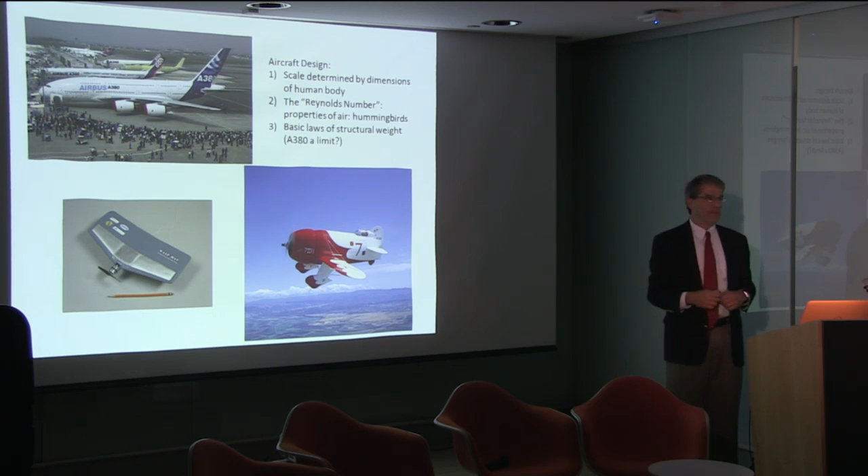But you can't really make a flying hummingbird at a human scale. I don't think we've ever made anything flapping like a bird that's gotten more than a few feet off the ground. That's about it. Practically speaking, it's just not going to happen, and it's the basic laws of structural weight you have to keep in mind.

With spacecraft, it's even more crazy in a way, because you have these enormous vehicles that burn through thousands of gallons of fuel and oxidizer just to get off the ground. It just sort of lumbers off the ground. I compare it to a Greyhound bus pulling out of Port Authority. And then what do you got at the end?

You've got this little tiny capsule that John Glenn said you didn't get in, you put it on. He was squeezed in there. We've got it on display, and boy, I'll tell you, it is small.

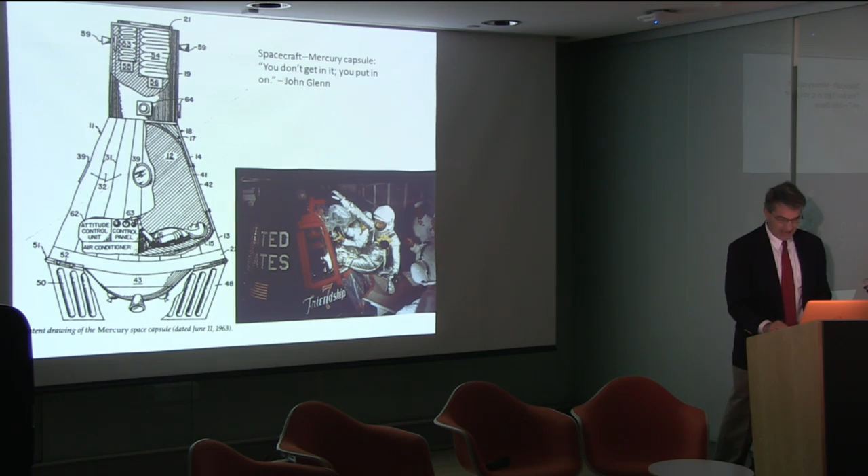We went from there to the space shuttle. This is on exhibit at the Air and Space Museum, seven passengers plus cargo, about the size of a small aircraft. The public obviously loves this thing, as you might imagine. It's incredibly impressive, but it also really pushed the state of the art for size.

And I don't think, and I'm not speaking as an engineer here, I don't think we're ever going to build anything this big again to bring human beings into space and back again. I really think that kind of pushed it a little bit farther than it probably had to go.

We are going to build shuttles again. There are plenty of them on the drawing board, but they're going to be probably smaller. There's good reasons for that from an engineering standpoint.

Another issue we deal with, as you probably know if you've been following the space program, is all the talk about going to Mars, getting beyond the moon, extending our species into the entire solar system, colonizing the planets. We may be finding life on the moons of Jupiter and things like that.

What are the practical issues? We don't have a Saturn V in our exhibit, although there are three of them in existence, in Huntsville, Alabama, Florida, and Houston. But they're 360 feet tall, 6 million pounds, and what did they do? They took two people to the moon for 21 hours, and then they came back again.

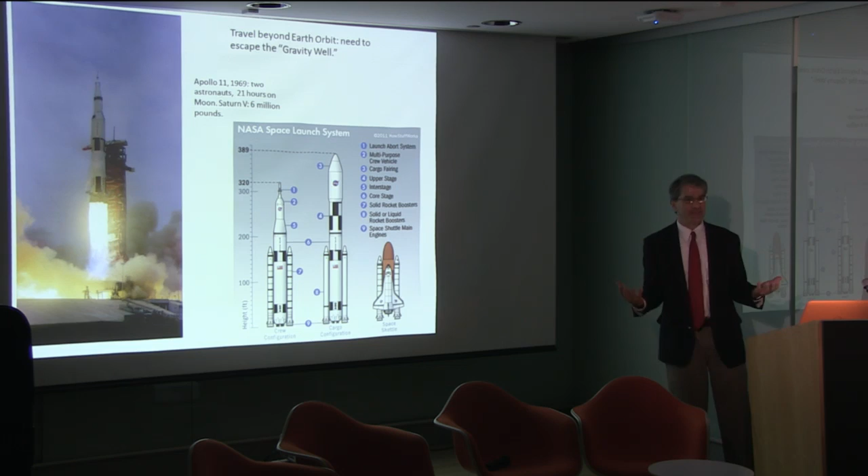So why are we doing this? Of course you have these robotic vehicles with tremendous advances in microtechnology that can do all these things. But a couple of people have pointed out to me, you all know about the Curiosity rover on Mars doing all kinds of wonderful things. If you could have gotten a human being onto Mars, he or she could have done the same kind of science in about a week of walking around that Curiosity has taken a year to do. So you want the human being. Now you've got to solve all these technical problems to get a human there, but that's what you have to do, because human beings want to explore. It's in our nature, and we're going to explore one way or another. We're going to find out a way to do it.

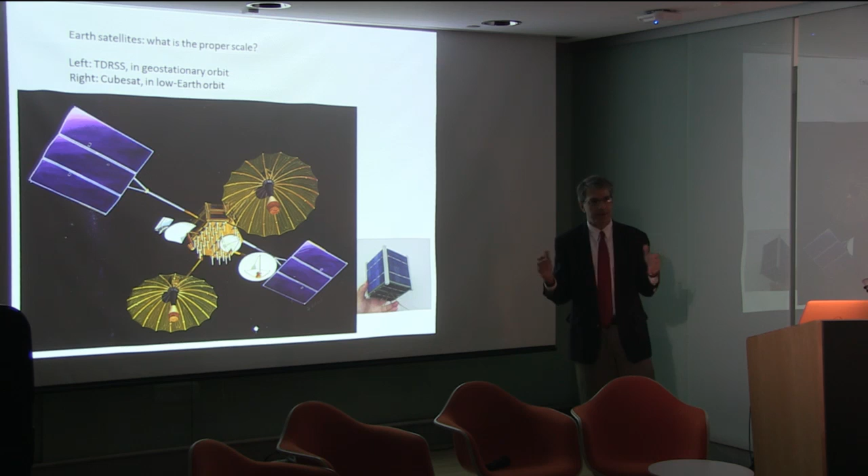So again, this is the scale that we have. These are the very popular CubeSats, about this big, built on college campuses, that can do all kinds of wonderful things using recycled iPhone parts and things like that. This is sort of the upper limit, called the Tracking and Data Relay Satellite System, which is up in geostationary orbit. Interesting story there: in the early days of the space program you had tracking stations all around the world, some in politically very sensitive places where people were a little nervous about Americans coming in with sophisticated electronic equipment. All of that has now been replaced by a series of satellites way up in space, where you send the data up there and then down to the ground in the United States, and you don't have to worry about that. So that's a big thing.

This is a little thing, but do we really want to have a whole bunch of these swarming around in low Earth orbit? I'm not so sure about that. It could get a little bit polluted up there.

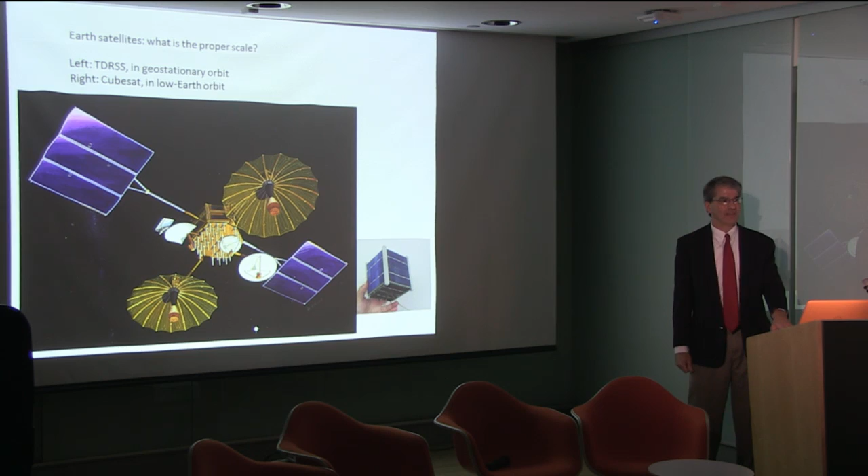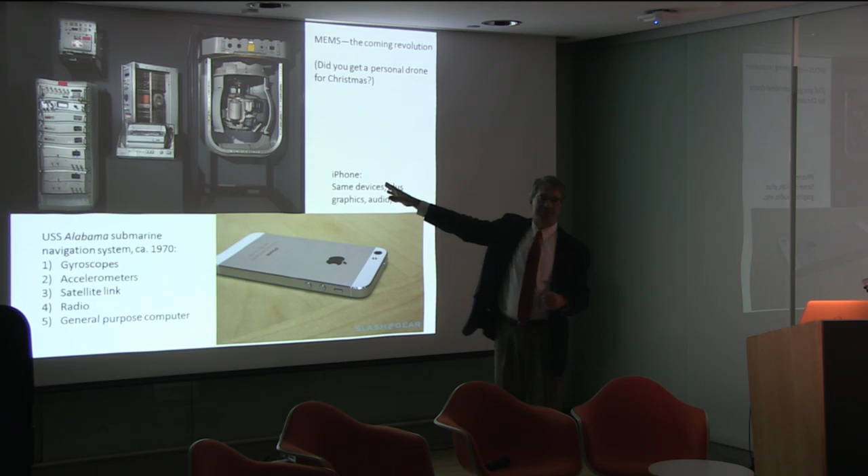So I'm going to conclude really quick. You've got an iPhone upstairs, and you know all about all the things it does. Our exhibit opened at the Air and Space Museum last year that shows an inertial navigation system from a submarine. There's the gyroscopes, the accelerometers, there's the computer, there's an IBM typewriter which is a keyboard, and those are the radios. Here it is, all in the iPhone. You've got all of that.

The irony of it is really weird, because this device was used to navigate the submarine so that it could stay secret—that's what a submarine is for. It had to poke a little antenna up every once in a while to take a fix from a satellite to fix its position. Most of the time it was completely secret; they didn't want to tell you anything about them. In fact, submarine people are the quietest people on Earth, they really just don't talk. The iPhone tells the whole world where you are all the time, whether you want to or not. They know where you are. Somebody knows where you are, and it's usually a department store or Google or somebody else. I don't even want to go there.

But anyway, it's the same technology, it's just shrunk a lot. So with that, I guess when you change scale, all kinds of interesting things happen. And I think I'll just leave it at that. Okay? Thank you.

I'm excited about the museum reopening and having this exhibit and display as one of its first.

I'm going to talk a little bit tonight about East Side Access, the current project I'm working on. Some of you may be familiar and several may not be familiar with what East Side Access is. I'm also going to talk in terms of scale, as Paul started us off on. We're going to talk about tunnel boring machines and some very large construction equipment and construction tools.

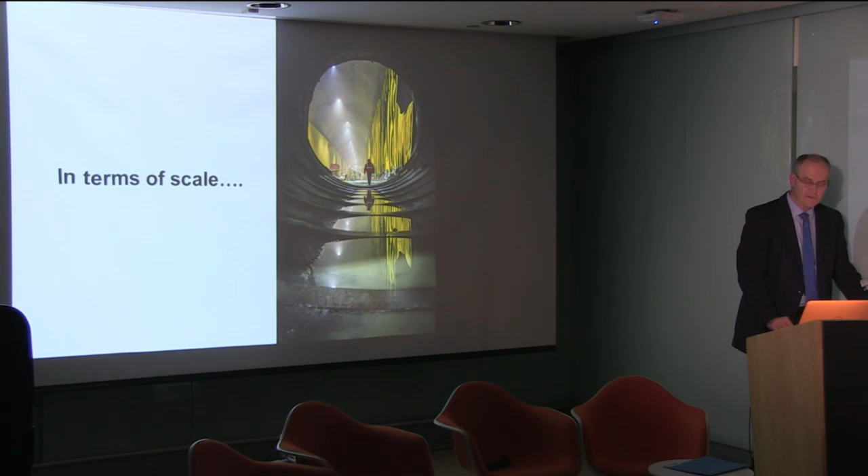But what I find fascinating about the construction industry is there's an awful lot of hand tools and an awful lot of innovation that has to go into how you use a whole variety of scale of tools to do different things as far as trying to construct what the designer has provided to the contractor.

East Side Access is one of the three mega projects under construction by the MTA right now. Second Avenue Subway is about $4.5 billion for phase 1, scheduled to be completed in December of 2016. The other one, a little more near term, is the 7-line extension to the west side. That's about $2.4 billion, and that's actually going to go into revenue service the 2nd quarter of this year. So they're getting pretty close on that one.

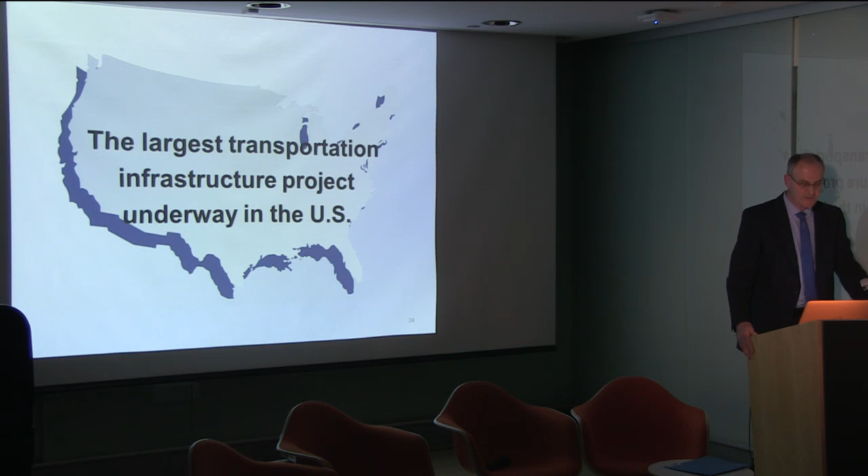East Side Access is our largest infrastructure project. It happens to be the largest transportation infrastructure project underway today in the United States. It's the first expansion of the Long Island Railroad in over 100 years.

This is a good diagram, it really shows what we're doing. Right now, as most of you know, the Long Island Railroad comes into Penn Station, and Metro North comes into Grand Central. The primary purpose of the project is to bring Long Island Railroad into Grand Central Terminal. So we've done tunneling in Sunnyside Yard in Queens, on the right side of the screen. We've made a connection to the 63rd Street Tunnel, which was built back in the 80s for New York City Transit, but it was also built with a tunnel for Long Island Railroad with East Side Access in mind.

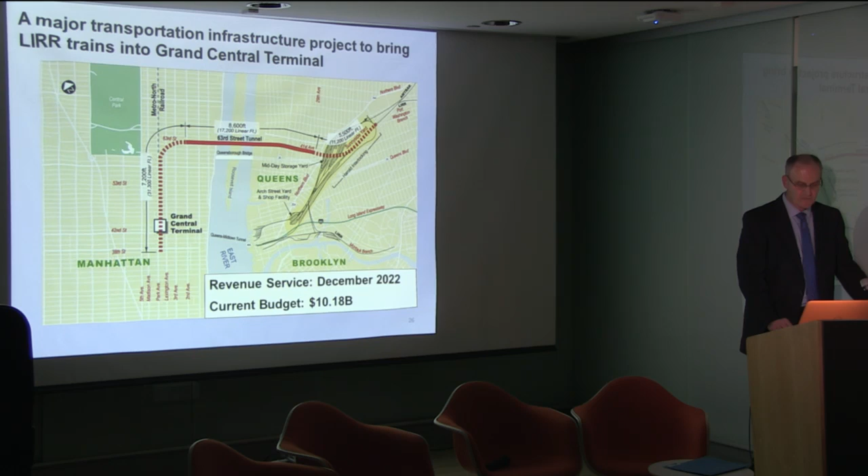This is a project that's been in planning for decades, and incrementally we've been putting infrastructure in place for it. The tunneling comes down through Manhattan from 63rd Street, underneath Grand Central, down to 37th Street. As you can see there, it's about $10.18 billion, our current budget, with a revenue service date of December 2022.

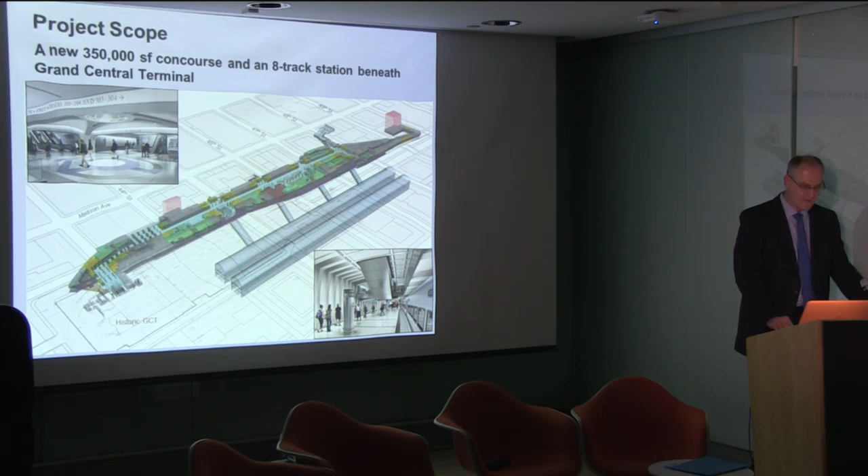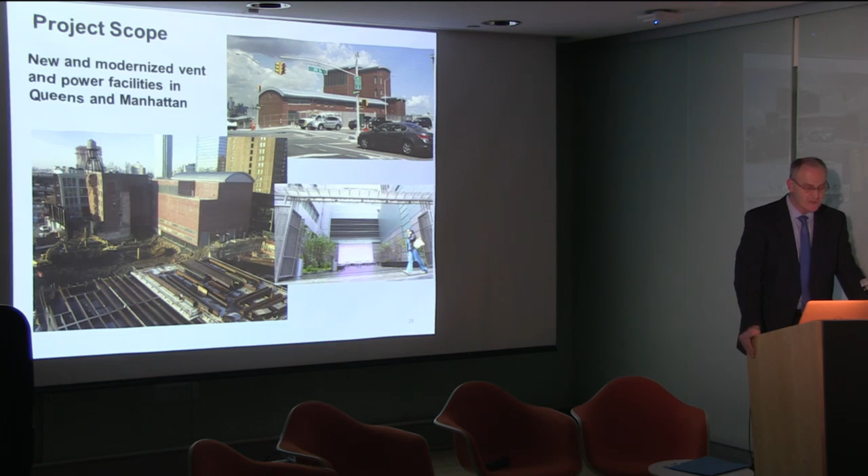This is a rendering of what's being constructed. It's about a 350,000 square foot concourse below Grand Central, with a new 8-track station beneath Grand Central, connected by high-speed escalators from the train platforms up to the concourse. We're also building new train yards and maintenance facilities in the Bronx and Queens, and new modernized ventilation and power facilities both in Queens and Manhattan.

It's also going to support job growth in the area around Grand Central Terminal, where there's a lot of development planned. And it's going to improve our East River Tunnel capacity by over 50%, because we'll be diverting traffic from Penn Station through the 63rd Street Tunnel below Grand Central.

So some of the tools and equipment we used on East Side Access: tunnel boring machines. We've used four tunnel boring machines that I'll talk about. This is a SELI TBM — SELI is the manufacturer. We also had a Robbins machine, a Hard Rock TBM. Both of these are Hard Rock tunnel boring machines. This is a pretty good picture — they're all pretty similar, using what we call cutter disc technology.

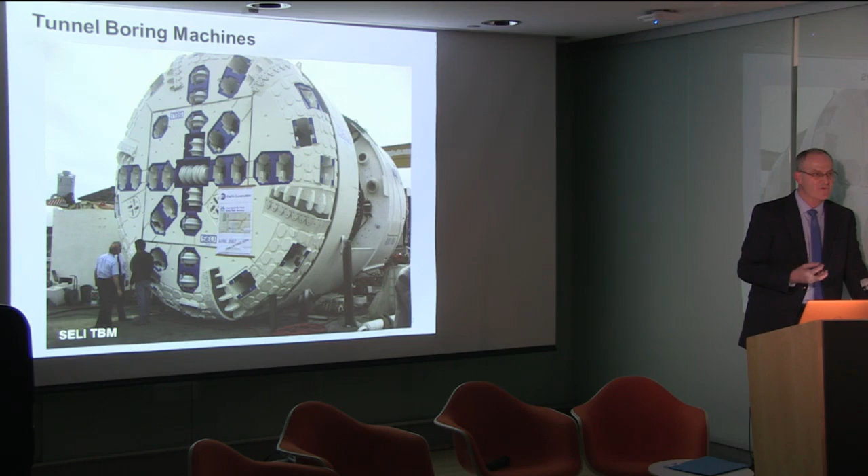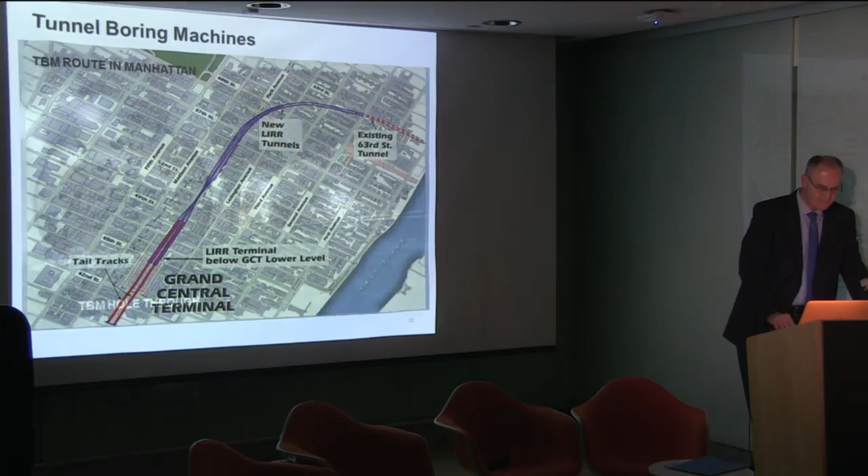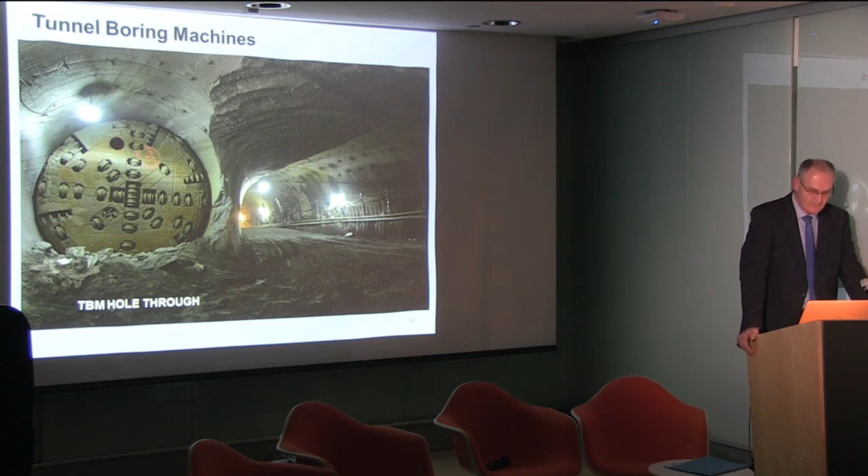This is a picture of one of the tunnel boring machines holing through, which is an exciting part because you're at the end of a drive. There's an awful lot of work that's gone into getting to that point.

This is a picture of the very south end of where we were tunneling, down to 37th Street and Park Avenue—this is the end of the TBM drive. We had two Hard Rock TBM machines. The Robbins machine was removed by the contractor and dismantled.

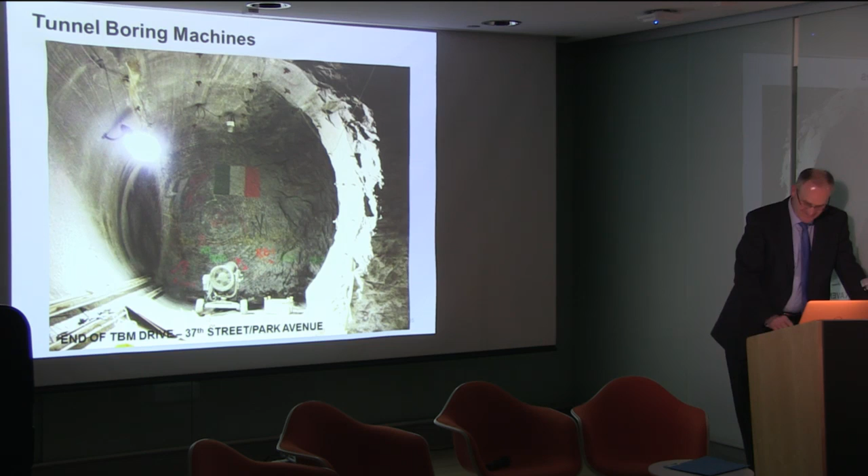The Seli machine was backed up from this point, and the crew took a hard right turn and buried the machine in the bedrock. So we've created a time capsule down around 36th Street and Park Avenue for someone in the future to uncover quite a surprise when they excavate or drill in that area.

These are the soft ground tunnel boring machines that were used over in Queens, underneath the rail yard. They're designed differently—they have the ability to go through soft ground, and they do it under what we call a slurry mix to maintain stability.

There were 2 machines, 4 tunnels, and 4 drives done over about a 2-year period. Herrenknecht was the designer and manufacturer, a German company, for these machines. All of our tunnels are 22-foot diameter tunnels—that's the tunnel size for both the subway and the railroad.

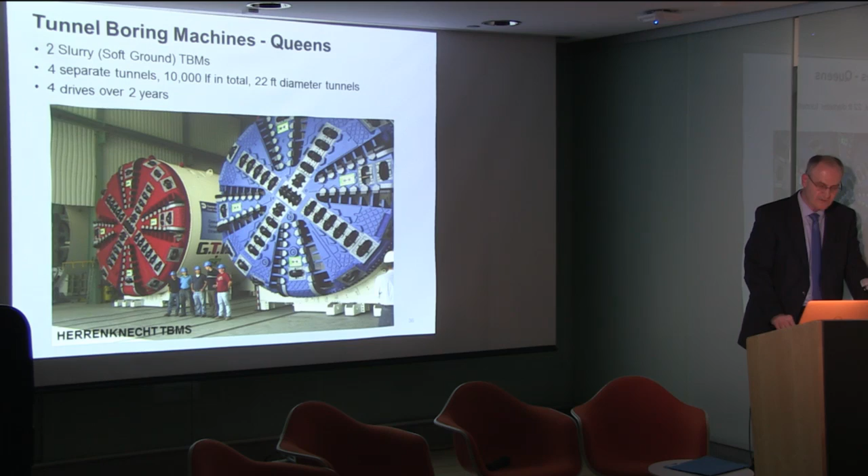This is a diagram of Queens Boulevard at the bottom of the slide, with Northern Boulevard just to the left to get you oriented, and this is the Sunnyside Yard area in Queens. We had to build a box first to assemble the TBMs and launch them, shown in the lower left, and then you can see the 4 tunnel drives that went out underneath the Sunnyside Yard, under the active rail lines.

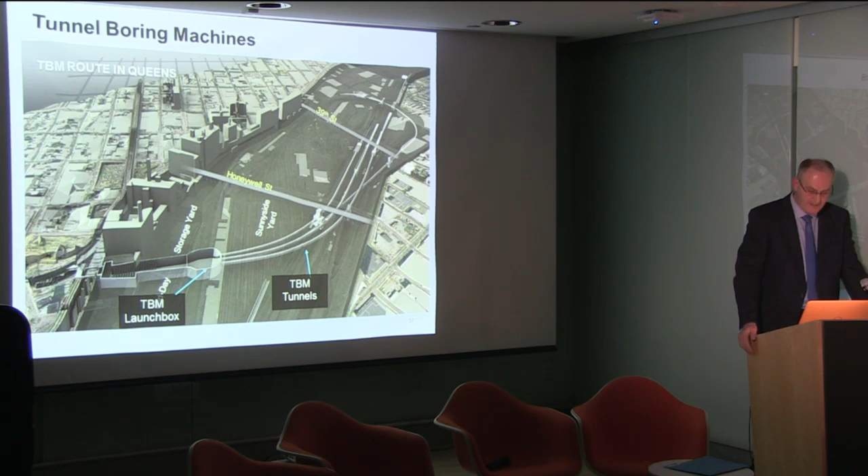This is just a shot of the launch tunnels. You actually have to cast these in concrete to build a place to start—like a pilot hole if you're trying to drill. You have to start with just the launch area.

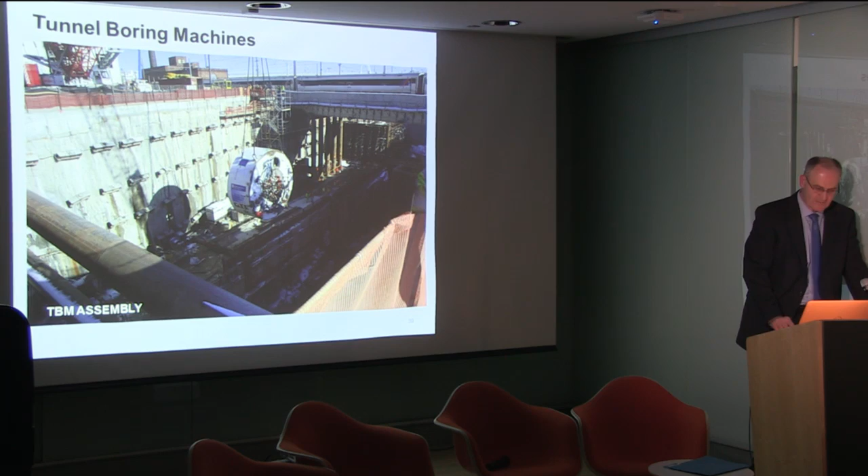This is the part of the machine coming in. As an example, on 2nd Avenue Subway when we built the launch box at 96th Street, the contractor had 35 trailer loads of equipment that came in to assemble 1 TBM machine to operate on 2nd Avenue—so you can imagine the amount of time and effort by the contractor and crew to assemble the machine.

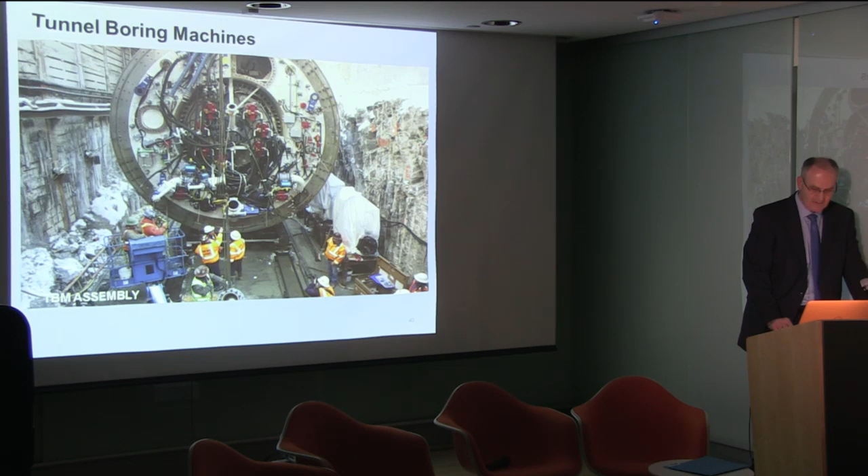This gives you a sense of the scale of the machine and the hydraulics and electric as it's going together—you can see the men standing at the bottom here. And when it's all assembled, it's ready to go into the launch box.

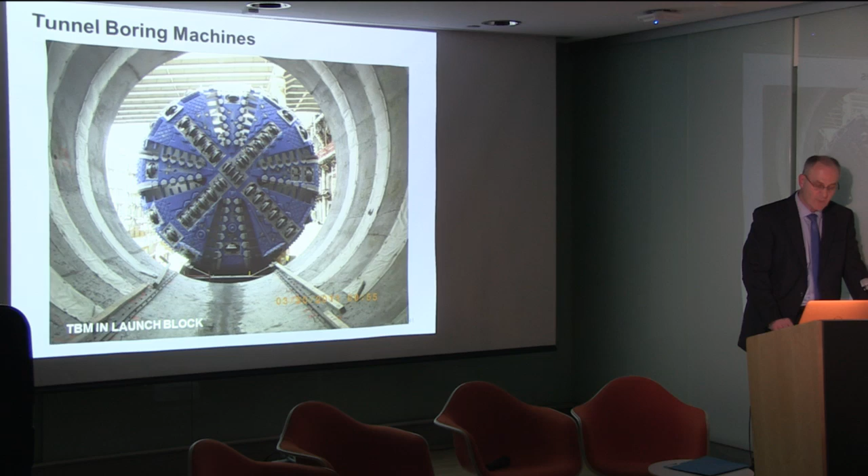We did not have the luxury of shutting down Amtrak or Long Island Railroad for this project—we had to maintain an operating rail yard. So micro tunneling with small boring machines was utilized to cross the rail yard.

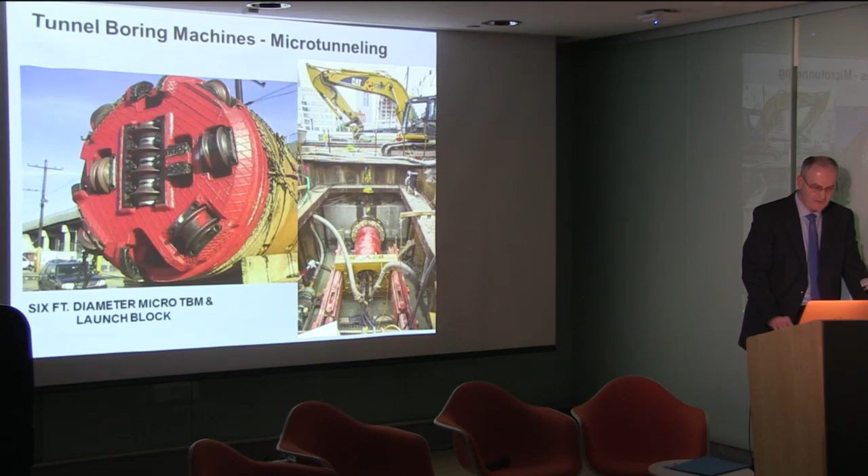This is the other end, and there's a lot of work to get these machines in and out.

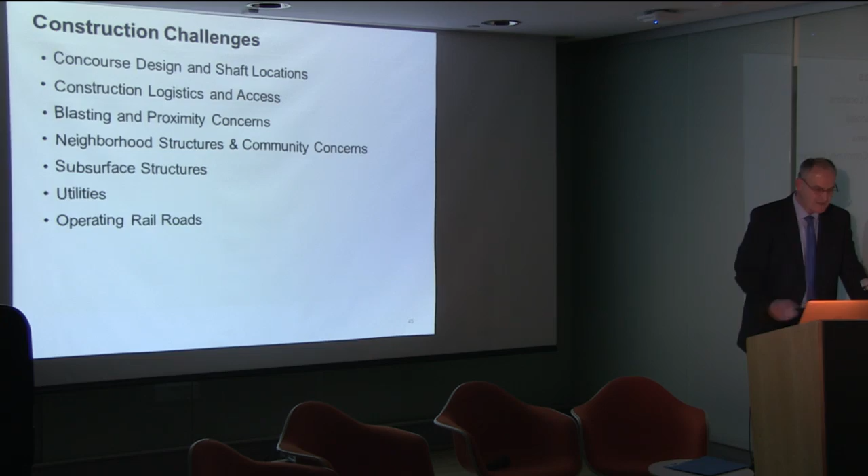So this is the demobilization of the machine. A lot of construction challenges in projects such as this. I'm going to touch on some of these as I go through some of the other tools.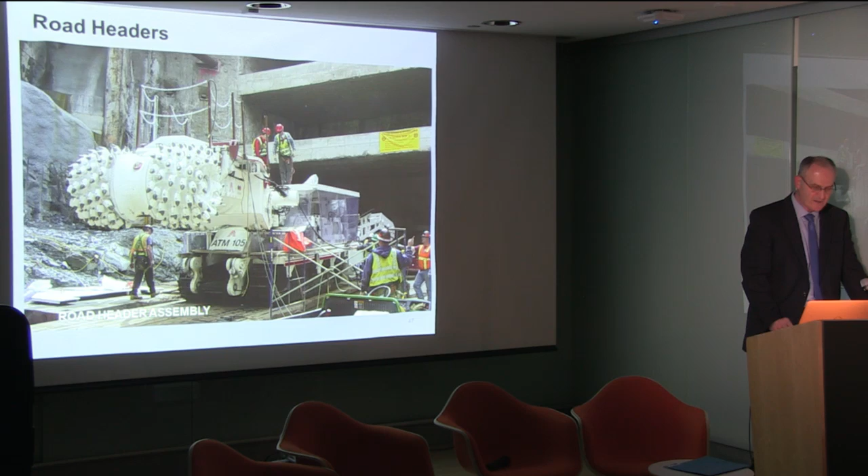So obviously we need to modify tools and use specialized tools for different challenges. In areas where we really can't use blasting or a tunnel boring machine, we'll use what's called a road header. It's kind of a gnarly looking machine, but these rotate and we put them inside the cavern, and if you look closely, you can see the grinding on the walls. So we'll trim the walls back to finer work than the tunnel boring.

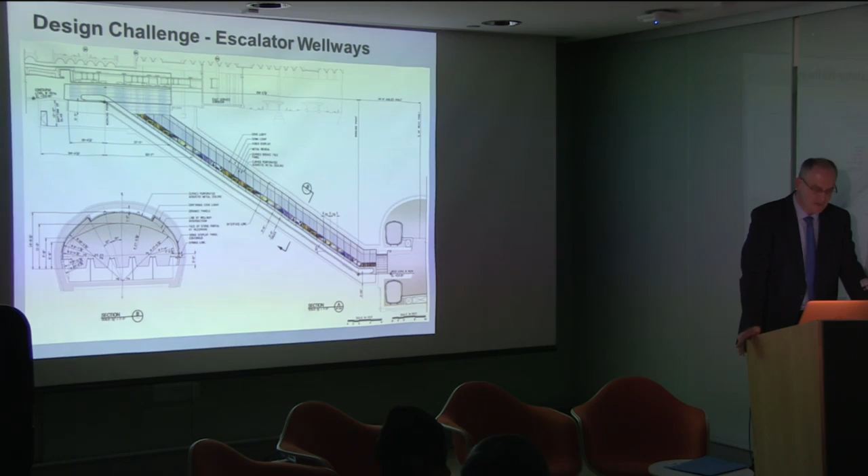I mentioned before we had escalator wellways, which we have a total of 17 escalators that are going to service the new train station up to the concourse. So one of the challenges was, how do we excavate these wellways? This is what the escalator is going to look like in the future as you come up.

But inside of the terminal, below the terminal, this is what it looked like when we started. We first had to remove columns and do underpinning and put in these large beams all the way across to create an opening where these wellways were going to go. And then you can see that we've started doing some rock removal here to start the wellway.

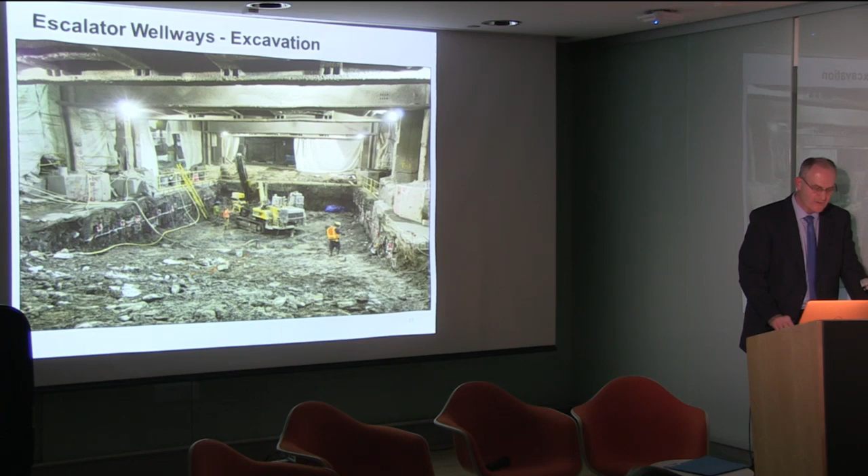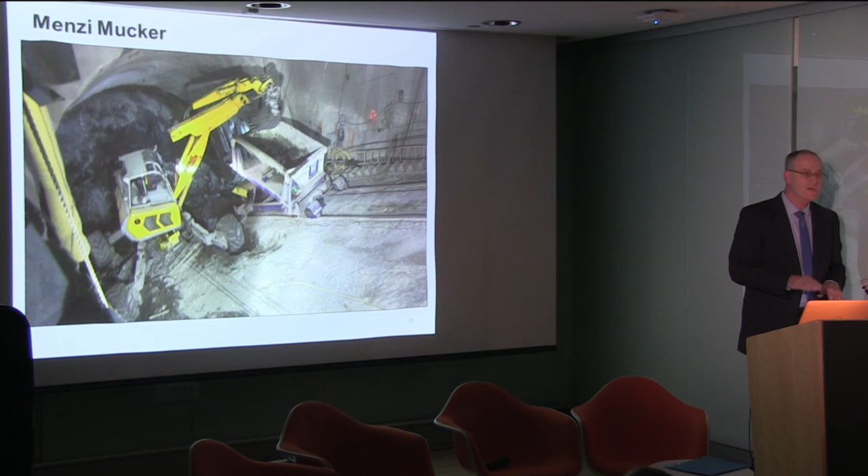Then you get into, of course, the wellway is a steep incline for the escalator. And you've got specialized equipment like the Menzi mucker, which is quite a piece of equipment. It has articulating not only the boom with the excavating bucket, but each of the tires and legs of the machine can be independently operated and adjusted. So this can move up and down over rough ground, as well as up and down an inclined slope.

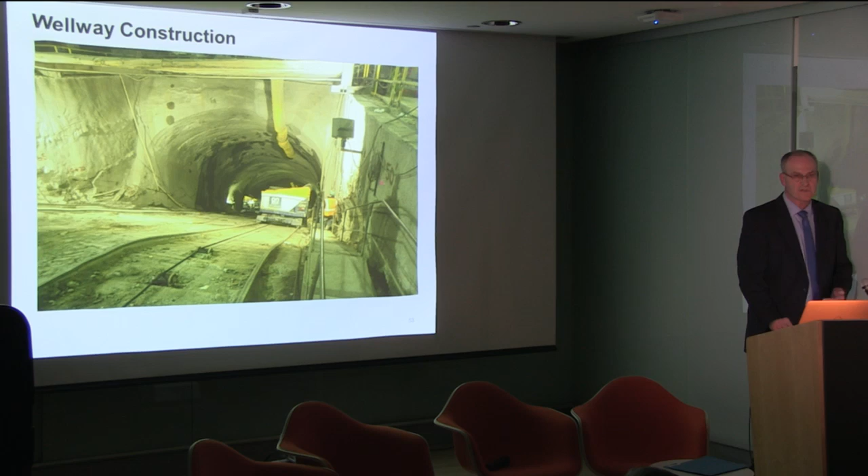And you can see we used a muck car here on the side on a rail, and it comes up and down on a winch system. These are some of the tools that are used in this type of construction to excavate rock.

This one is kind of interesting. This is called a raise bore machine. This was down at 37th Street. We had a need to put in 3 vertical vent shafts very close together, and you can see we're near the existing Park Avenue tunnel, the Lexington Avenue subway line, and we're in close proximity to the Union League Club. So blasting was not an option for these.

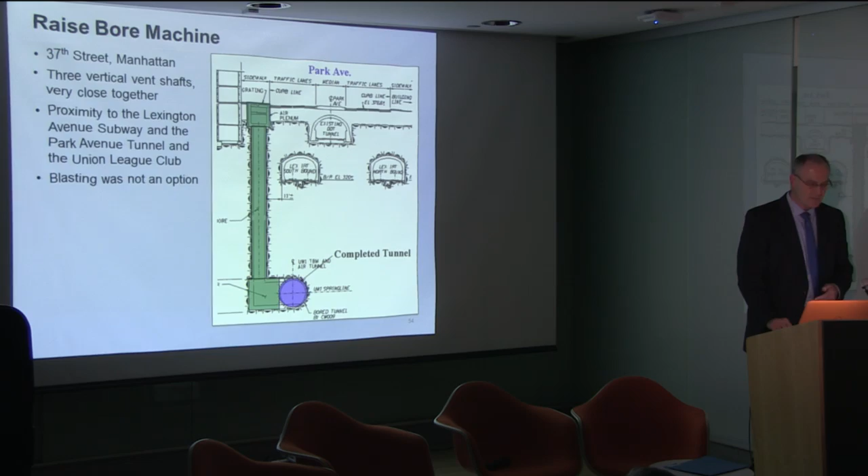This is a picture of the Union League Club and our work zone out here, and you can see the drill shaft, which I'm going to explain in a minute.

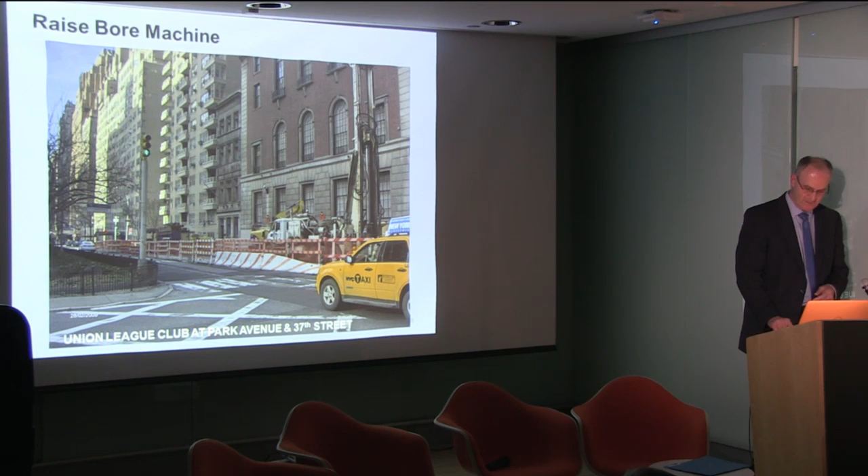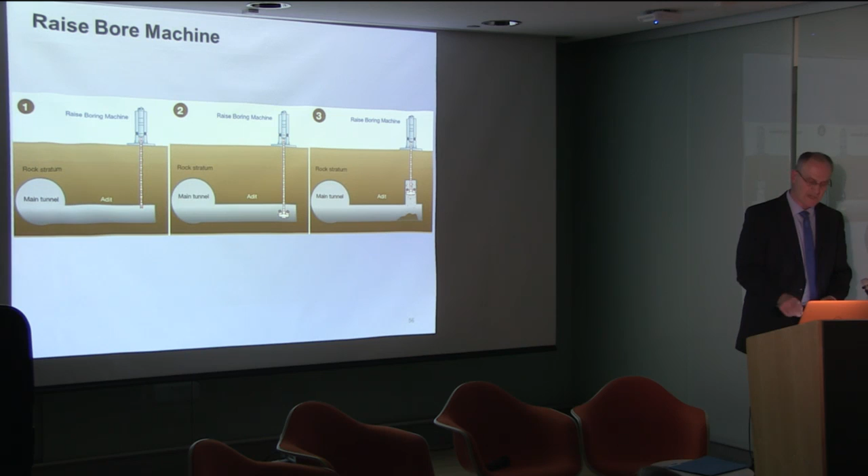This diagram here shows a raise bore machine. If you look over on the left, basically you start with a pilot hole and you drill down to your tunnel area that you're trying to sink your shaft to. And inside there, you then can build and assemble the raise bore portion of the machine, and then you actually excavate it from the bottom up. And gravity, of course, you drop the rock into the bottom of the tunnel to remove it.

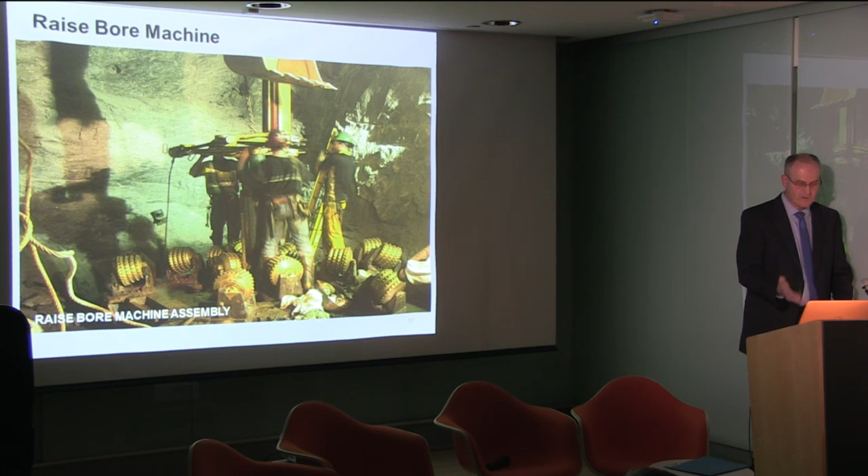So this is what it looks like in the field. You have to assemble this in the bottom of the tunnel, which is eventually the bottom of the shaft. So you can see the crew here, a lot of handwork, a lot of chain falls and stuff to move these heavy heads around to get them all aligned.

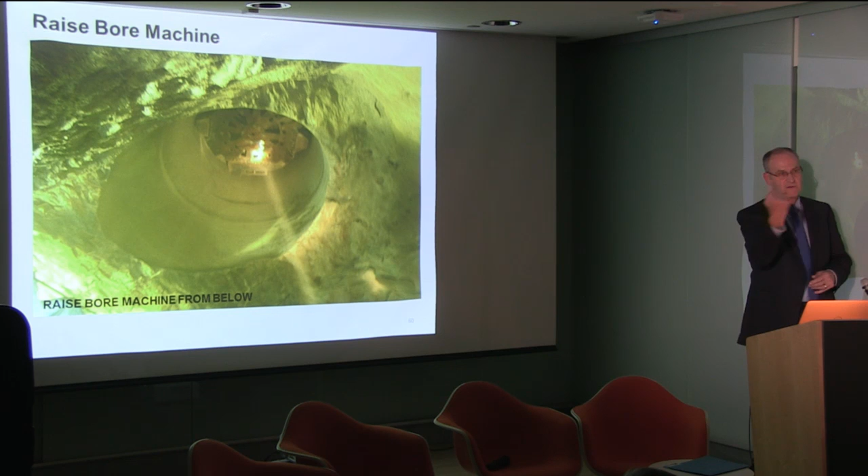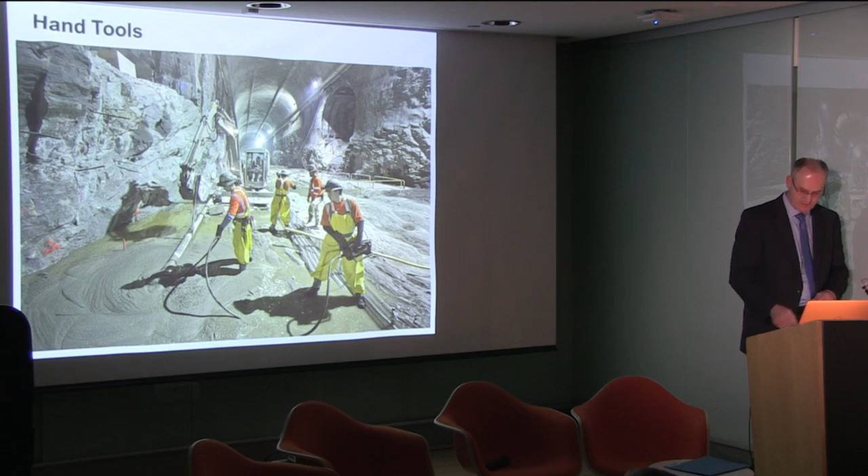Some of the hand tools that I referred to, this is probably a good example here. We place an awful lot of concrete in the caverns and tunnels. You got a crew here using a vibrator. The man on the left's got a vibrator where we consolidate and move the concrete. And of course that has to have its own motor and power, and that's what the guy on the right is holding, the motor that operates that.

And then you get into these very large caverns, and you have the need to do shotcrete work, which is another concrete technique, and you got to have articulating hand booms, or man lifts rather, that get the people up high on the wall where they need to be so they can do that.

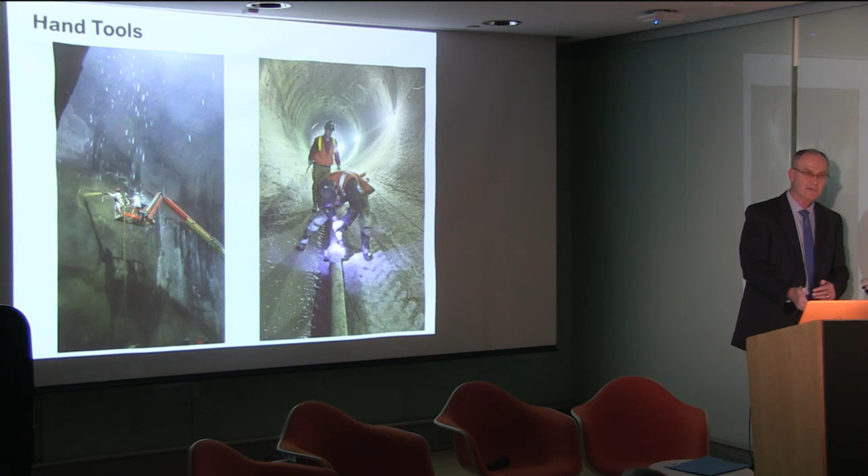The shot on the right shows we move an awful lot of material, whether it be concrete, water, or air, by pipe in the tunnels. This crew is using a drill to tighten a coupling. It's all mechanical coupling for these pipe connections.

A lot of work goes into placing concrete. On the left you can see all of the through bolts and braces and stuff that go into formwork, which you need to put in place in order to place and build reinforced concrete walls.

The worker on the right has got a hand drill that he's using to chip and remove concrete. The yellow material in the background is the waterproofing. All of the tunnels are waterproofed, as well as the cavern. And there's always a lot of drilling of temporary attachments that need to be made.

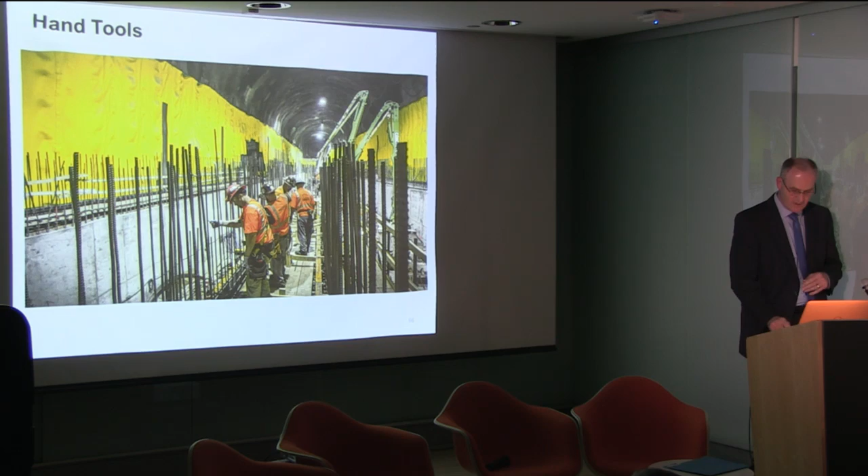This crew here is what we call lathers. It's a little hard to see, but basically in their tool belt they have a spool of simple steel wire and cutters. You want the wire to be able to bend but not break—strong enough that they can tie and make mechanical connections from one piece of reinforcing steel to another, to hold the reinforcing steel in place until the concrete can be placed around it. That's all handwork with wire and ingenuity.

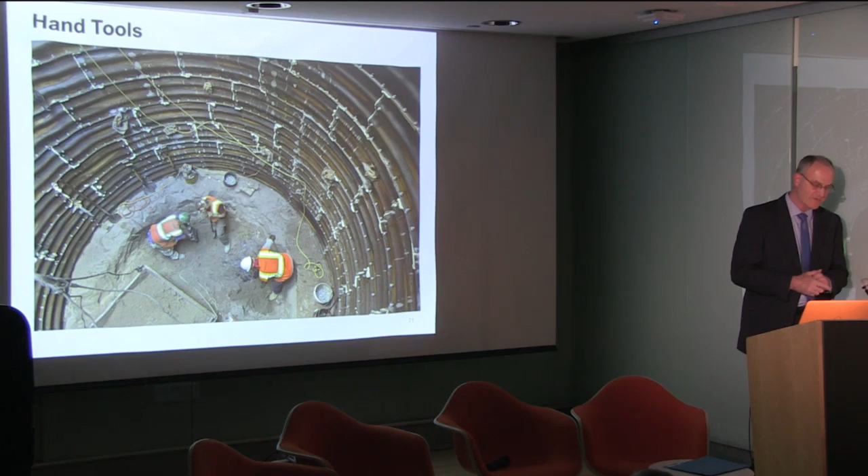In the rail yard, we've got challenges because of operating trains. We don't have a lot of room between rail lines, and oftentimes you've got to do an awful lot of handwork, especially when excavating at the surface. Even some of the larger excavations, trying to uncover a large utility pipe at the bottom, end up being handwork.

There's a lot of hand shoveling—they're shoveling into a skip pan, which then comes to the surface to get loaded out. So this is just a simple picture: as advanced as the technology is for TBM machines and that sort of thing I've shown, there's also an awful lot of hand digging with various types of shovels and pinch bars for various equipment in heavy construction. So, thank you.

Our last speaker is Chuck Hoberman. He's an inventor who seamlessly fuses the disciplines of art, architecture, and engineering in his work on transformable structures. Through his products, patents, and structures, Hoberman demonstrates how objects can be foldable, retractable, or shape-shifting. He is the founder of Hoberman Associates, a multidisciplinary practice that utilizes transformable principles for a wide range of applications, including dynamic architecture, transformable stage sets, consumer products, deployable shelters, and structures for aerospace. Examples of his commission work include the transforming video screen that served as the primary stage element for the U2 360-degree World Tour from 2009 through 2011, the Hoberman Arch in Salt Lake City, installed as the centerpiece for the 2002 Winter Olympics Games, a retractable dome for the 2000 World's Fair in Hanover, Germany, and the expanding geodesic dome at the Pompidou Center in 1997. He's also been included in some of our exhibitions here at the Cooper Hewitt, the triennial being one. So Chuck?

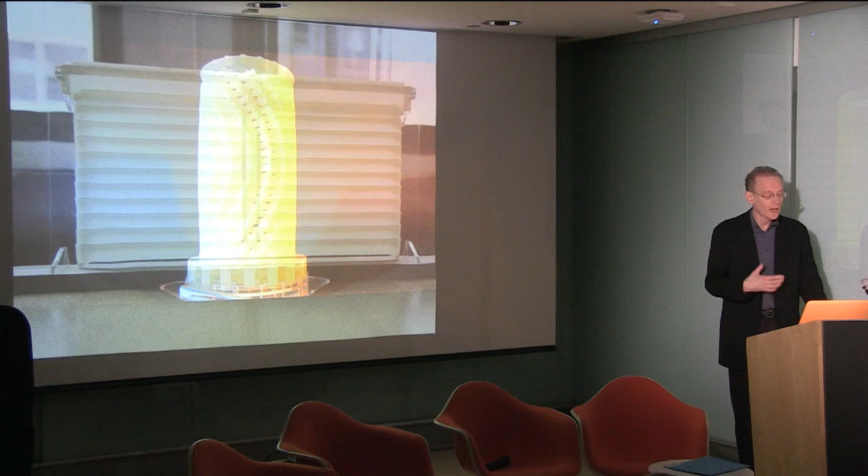These are just laser-cut plastic linkages. Nowadays we can also make these types of structures using 3D printing. This, in fact, is a mechanism comprised of hundreds and hundreds of joints that transforms, but it's all done from a single 3D print.

This is a prototype for a kind of curtain, and you'll see that a prototype like this shows the actual physical scale mock-up. It's for a curtain for a residence in Japan, about 30 feet across, being raised up. So does building at scale tell you that something is going to work? No, but it can tell you that something may not work. It's a precursor to doing the kind of testing that a mock-up like this allows.

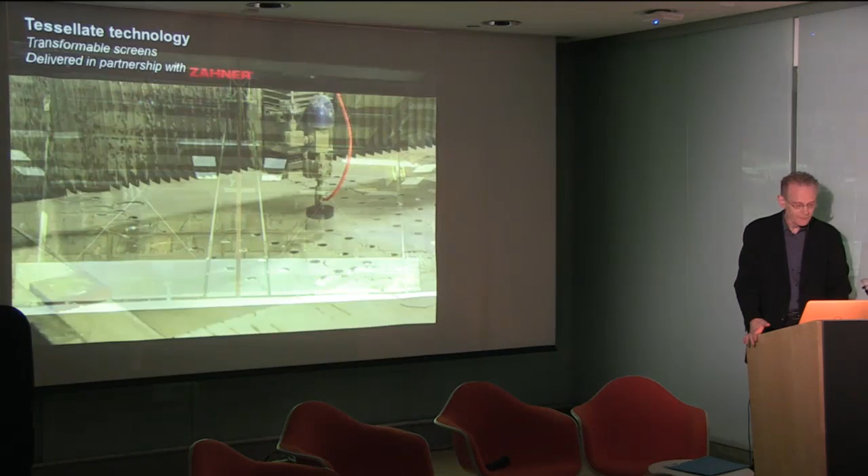We do a fair amount of architectural work for facades. This shows some manufacturing processes for a technology we call Tessellate, which are transformable screens. This is done at the Zahner Company in Kansas City, and I'll show a brief video of this particular project.

It's a kind of mid-scale project for us, somewhere between architecture and art. It's 8 screens, each one about 5 feet wide by 12 feet high, of shifting layers of stainless steel that control the light coming into the space. It's at a building called the Simons Center for Geometry and Physics.

I've had this concept for transformable design for a few decades now, and it's been a company that's a little unusual in that it's based more on a design concept and not on any particular sector. We've applied it in a number of different sectors at different scales, running the gamut from miniature medical instruments all the way up to architectural scales.

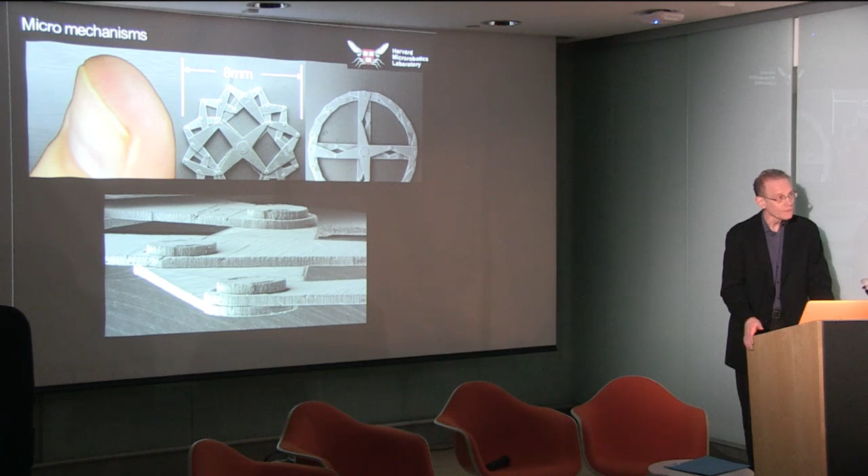This is more on the research side - some work I'm doing with the robotics lab up at Harvard, the same lab that did the RoboBee that Matilda referred to in the exhibit, showing a Hoberman linkage built out of a carbon laminate using micro-machining techniques. You can get a sense of how tiny these little articulated links are.

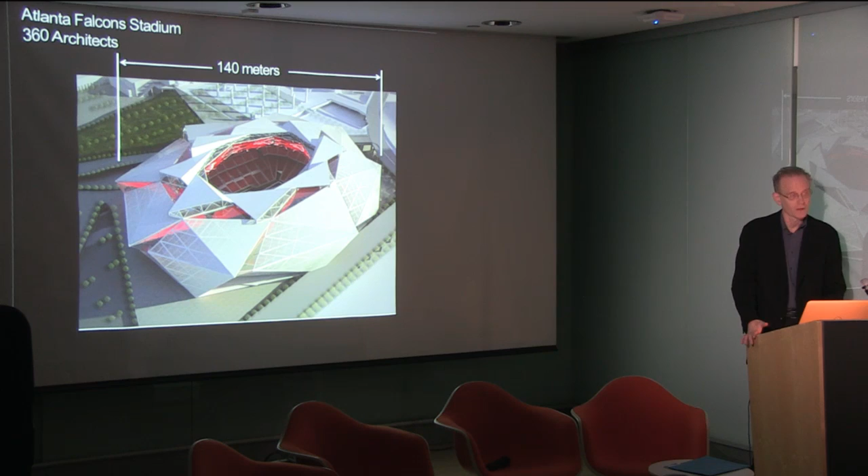At the other end of the spectrum, we're part of the team designing the retractable roof for the new Atlanta Falcons Stadium, which should be finished around 2017. From a design standpoint, in each case, from something the size of your thumb to something the size of a football field, you're using the same basic mechanical principles - there's something common in terms of the system.

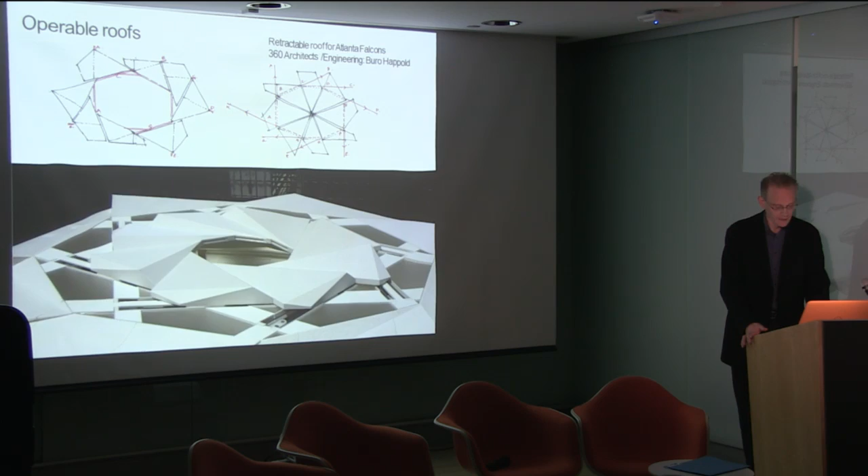For this particular project for the Atlanta Falcons Stadium, we were more involved in the creative concept stage, and this is a scale model that my group constructed - 3D printed panels sliding in a linear fashion to create this oculus. You can see at scale what it will look like, and 360 Architects created this. It's a very unique design in that it's an aperture that relies on linear motion instead of rotary motion, and will be quite an unprecedented configuration for a retractable roof at this scale.

For a project like Atlanta Falcons, we're just a small consultant as mechanization specialists on a very large project. But for more typical projects for Hoberman, we do everything from design all the way through the construction process. This is a project which was, at the time, the largest we had done to date - a curtain for the Winter Olympics in Salt Lake City in 2002.

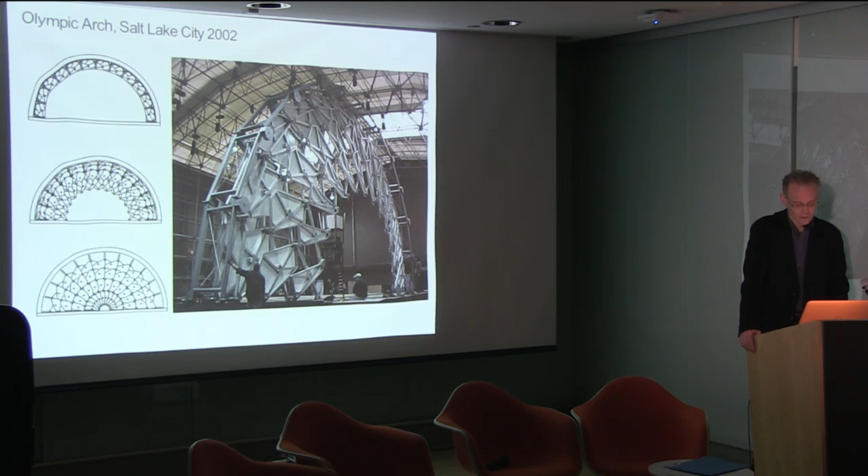It was a curtain on so-called Medals Plaza, where they gave the medals out every evening. The size of this is about 72 feet across. These are individual panels, each about 4 by 8 feet, made of extruded aluminum, connected together in a kind of trusswork. These were assembled in a horizontal configuration at the fabricators called Scenic Technologies, where it was tested, and then ultimately raised in Salt Lake City at Medals Plaza.

I always remember these moments of it being raised. There's a specialized crew running 8 different chain falls that are basically manually operated to synchronize the raising. It's freezing outside, the wind's blowing, and you're putting this thing in place, which ultimately you're told will be seen by billions of people on TV, and the thing damn well better work.

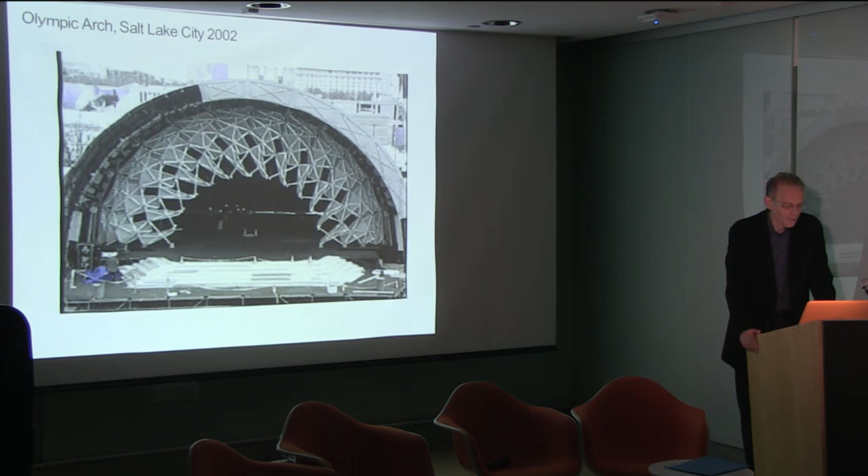Fortunately, it did - it did for the 17 nights of the Olympics. You can see it working here, and how it operated during the actual performance, where it's integrated with lights and music and dance.

I have always really loved working on these theatrical projects. Every industry - and I've worked in a number of them - has a different culture, and I always think of the live entertainment industry as one where people tend to say yes a lot more than no. Architects are a little bit different, I would say.

The U2 project, Atlanta Falcons notwithstanding, has really been the peak of working at scale. We were asked by the band and the creative team around them to create what they called a transformable video screen.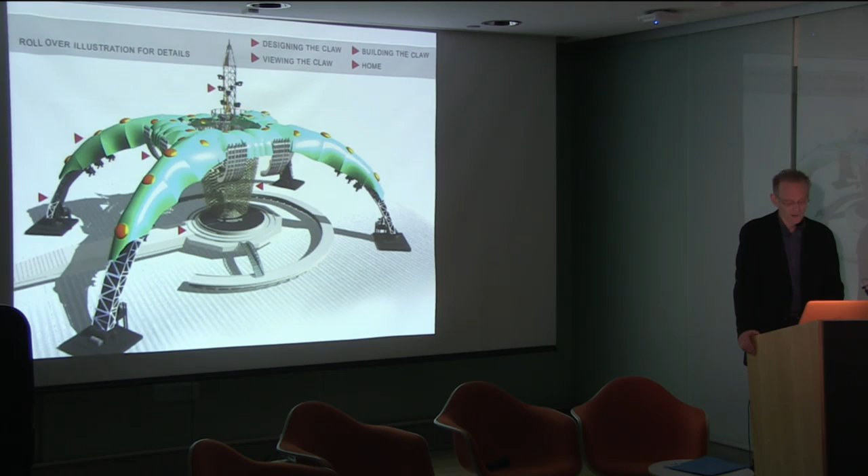The tour was called 360 because it was basically theater in the round. They had conceived this idea of making a giant superstructure called the Claw, a steel structure spanning about 200 feet, which is actually pretty large. They built three of these, which could be set up at different venues, with different elements added each time.

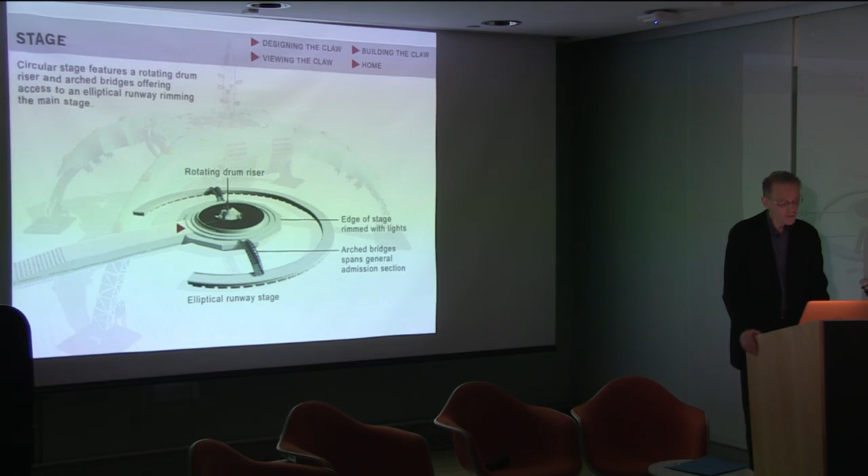It was wrapped with a kind of tensile fabric. There was a stage with kinetic bridges that would move around so the band could move from the center out to the horseshoe. The speakers themselves were each about two stories high. And then our piece was a video screen.

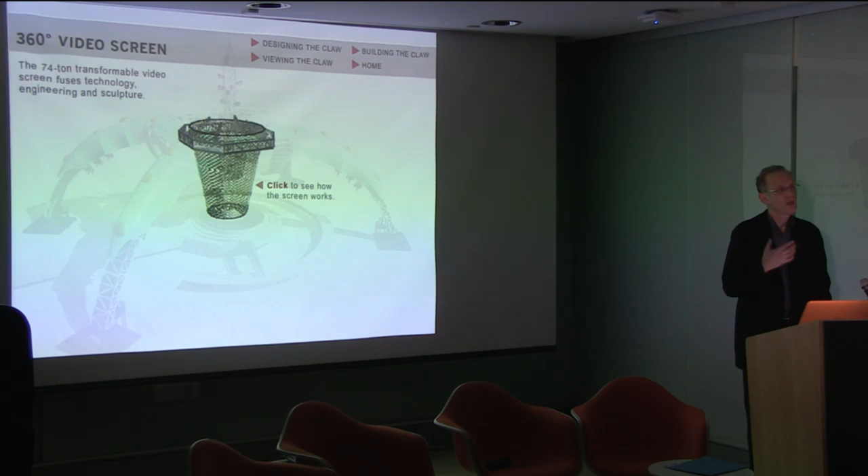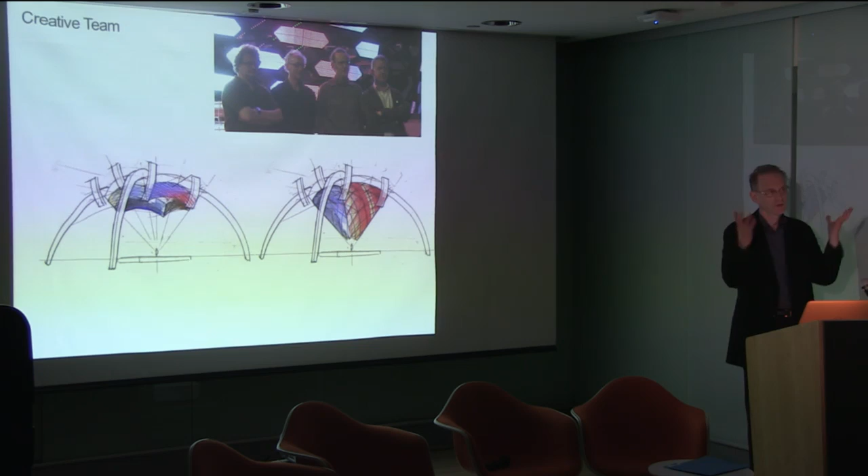The design brief was that they had built the Claw and wanted a very unique screen that somehow incorporated a Hoberman philosophy of design—one that would physically change its size in addition to having media on it. With this incredible team, who aside from myself are all kind of legends in the rock and roll world, we started sketching designs and quickly landed on using the Claw to support an expandable screen that would extend down towards the band.

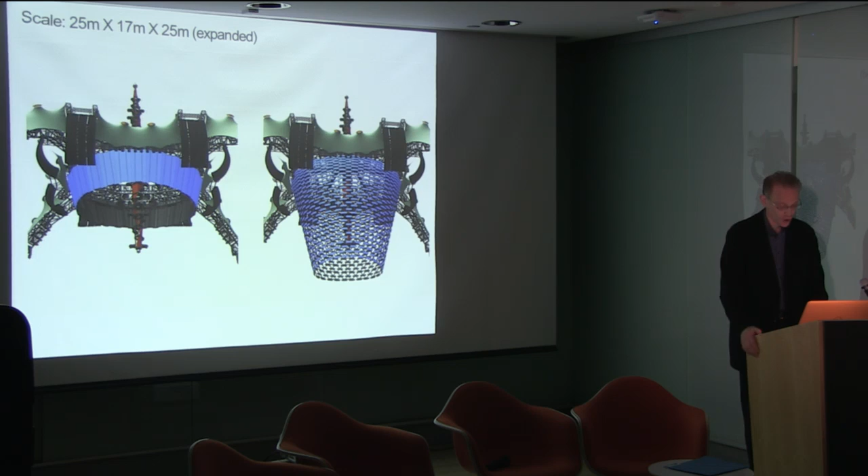The shape changed a bit so it became kind of an ellipsoid plan, a conical ellipse. What you're seeing on the left in blue represents a high-resolution video, about 4,000 square feet, which acted as a conventional video screen, but midway through the show it extended downwards. The size of the screen was about 85 feet high and about 85 feet across.

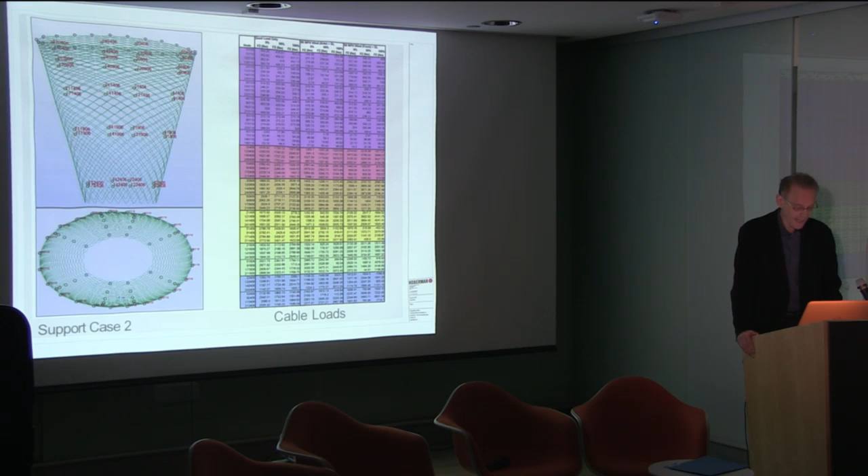The mechanical moving parts along with the electronics weighed about 30 tons. I mention that in relation to the structural analysis done by our partners, the engineering firm Buro Happold, where we were studying this unprecedented kinetic piece of 30 tons, which was basically being put over Bono's head. There was a lot of concern about whether this thing was safe, whether it was secure.

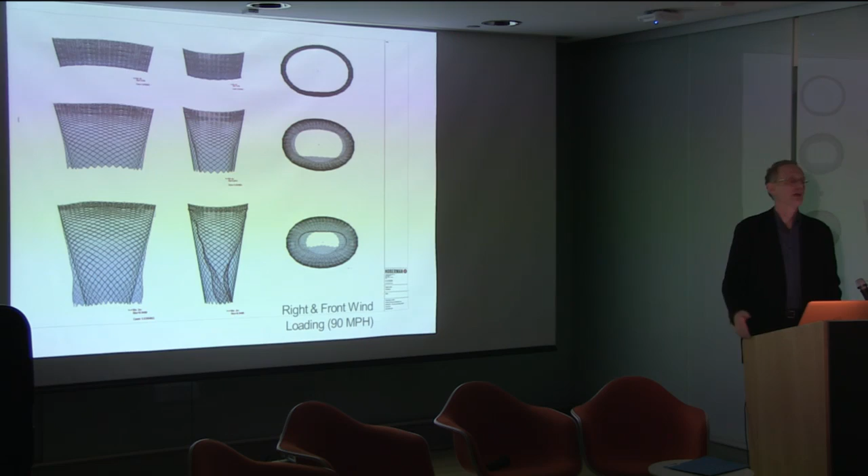There was a huge debate about whether that made sense—were we really going to see this kind of suction effect? That kind of debate on a project like this is where you're really working at the limits of engineering knowledge. A lot of people think that using great computer programs somehow removes uncertainty from a project, but in certain ways it actually enables more uncertainty, because you don't know if it's a garbage in, garbage out situation. Ultimately, the collective experience said no, that did make sense—we could trust the models, and we went on.

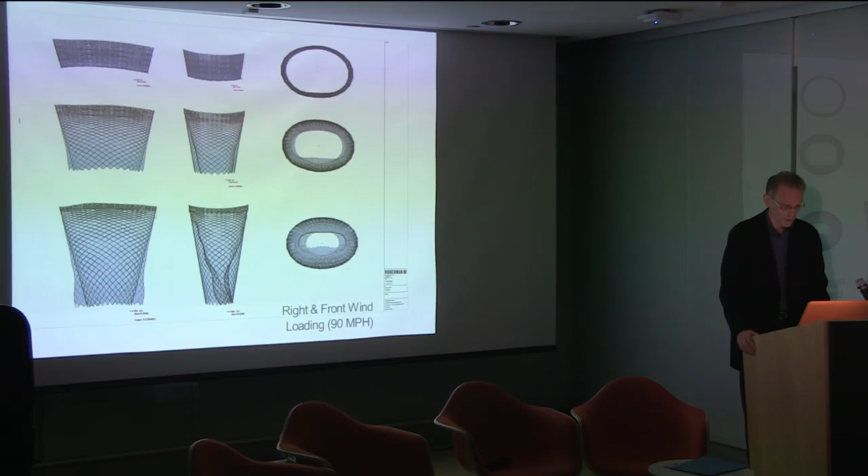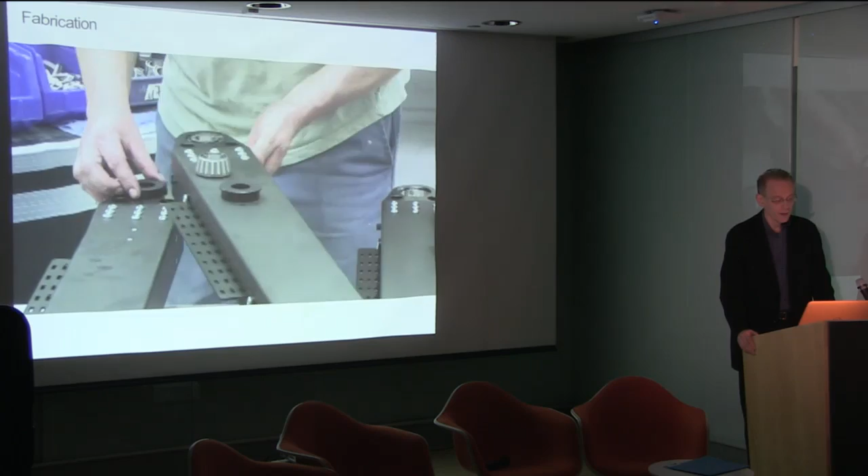This is a movie made by our client Barco, the LED manufacturer who assembled the screen. There are different linkages being put together with high-strength bearings, basically 96 units, each weighing about 700 pounds. They invented a kind of robotic forklift to assemble it, though the most incredible thing about this project is how they could assemble this giant screen in about 6 hours, entirely based on the skills of the roadies who traveled with the band.

One thing I learned, having attended a few of the concerts, is don't get in a roadie's way—they'll run you over, because they just don't care about anything except what they're putting together. And then the concert itself, where it all came together—you can see here the screen.

This shows a highly sped up version of the transformation of the screen. Again, it's a seven-story high object. It kind of just transforms in a way that's a very different experience than anything I could have imagined, although I sort of designed the thing as well.

And then this shows it being painted with these wonderful lights and images by Willie Williams, the band's creative director.

From here, I'm going to jump way down in scale to something a little bit more contemporary, a bit off subject, but I think it relates to scale, and also to the way tools and methods come together. I'm teaching a lot more now, at a few places, including the Harvard GSD Graduate School of Design, teaching basically how to build structures similar to what I do. They're building some pretty large things using these techniques.

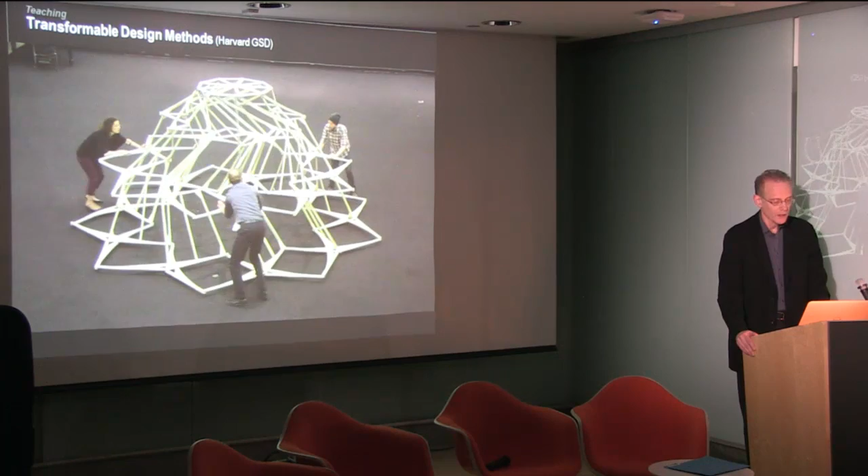This is a wooden expanding dome being tested, and here's a different one.

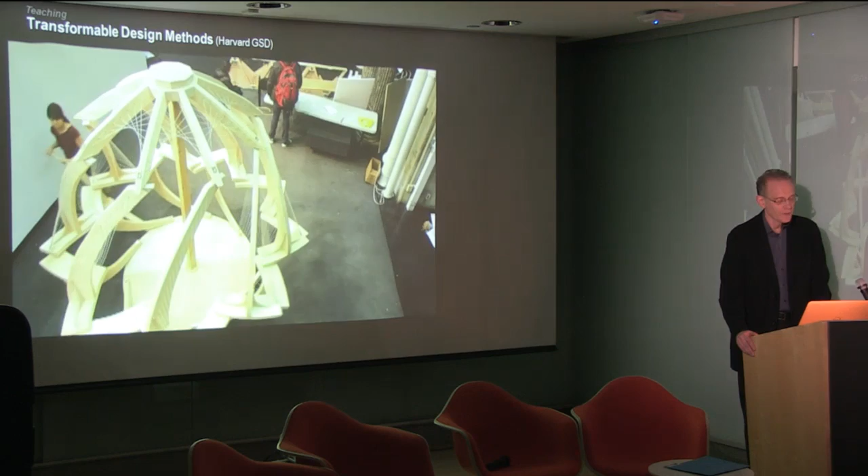It's interesting because the work I do has always been highly specialized, but we're finding ways to put it in the hands of young generations of designers who are finding ways to extend it. This gives me hope that these ideas may be extended in the future to make transformable architecture in all kinds of new ways.

Last semester at Harvard, I taught a very different kind of course called Informal Robotics, basically making robots not out of metal and hard machinery, but out of paper and soft gels. The idea is, can you fold and motorize a piece of paper and get it to walk across the table? It's pretty cool stuff with very interesting design methods.

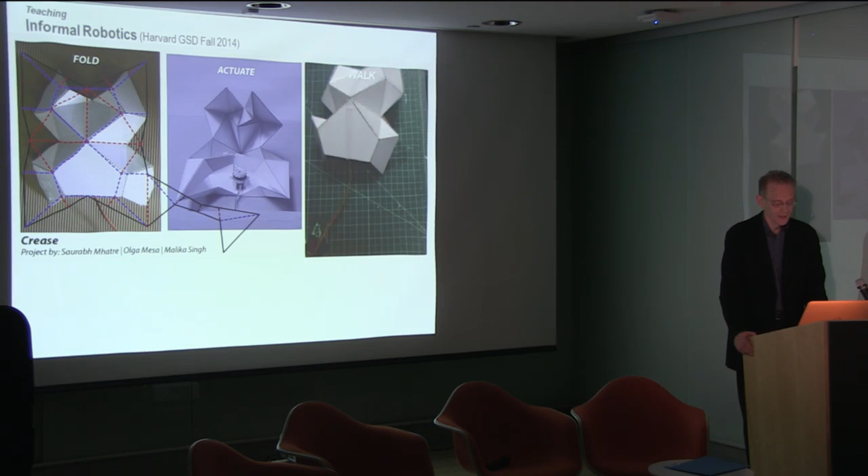I'll end with this image of this little walking platform. It just looks like it's walking at random, but here you see it's actually steering, and all of that is done by just a differential flexure of the paper. It's an integrated piece, an incredibly simple design concept with huge sophistication in terms of how it's actually implemented.